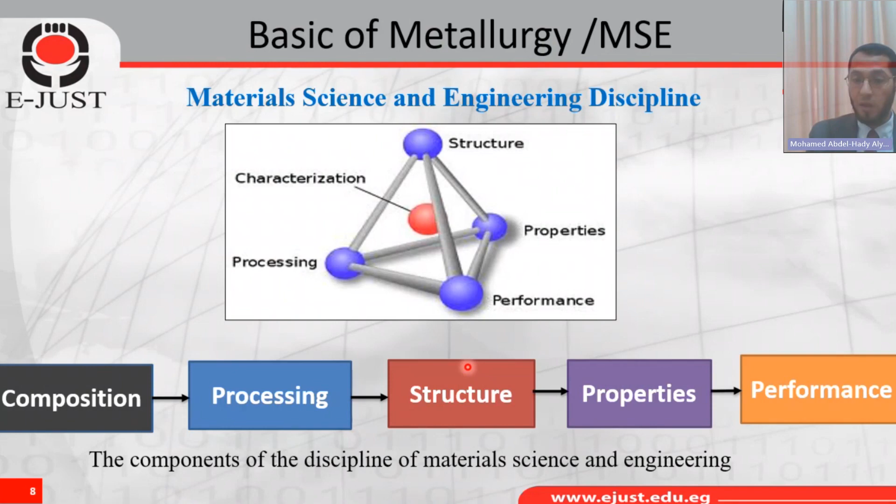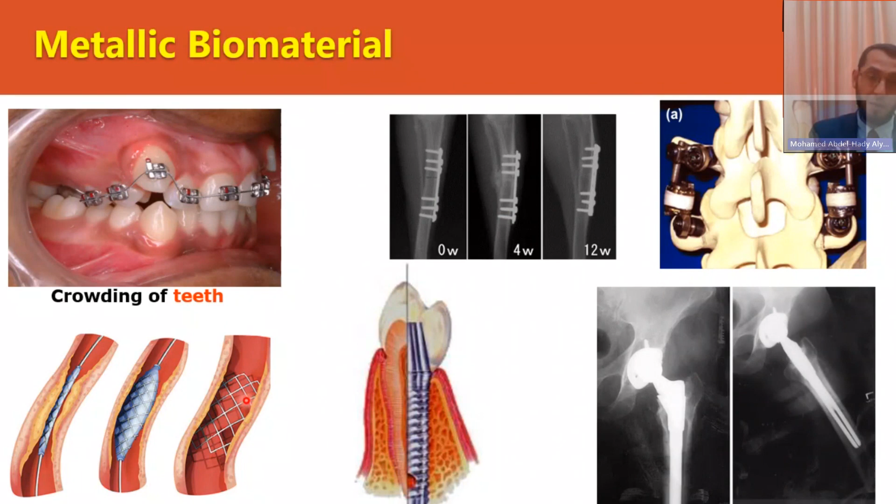Specifically, we'll talk today about biomaterials, not all biomaterials - we are talking about metallic biomaterials. It is very common in applications. You can see it in teeth crowding or tooth fixations - the guides, wires, or whatever, all these are metallic biomaterials. Bone plates to heal fractures, especially complicated fractures, spinal fixations, hip joints and knee joints, dental implants, and stents, even more. So these are examples. This field of biomaterials is actually a very wide and unique interdisciplinary field of work.

So if we're talking about the current biomaterials used, they have been developing for centuries, day by day, to meet requirements and have less harm on the body after implantation. There's always the theme of a new generation of metallic implants under progress, under improvement day by day. We have to start from material design, material processing, mechanical property, corrosion testing, in vivo testing, in vitro testing.

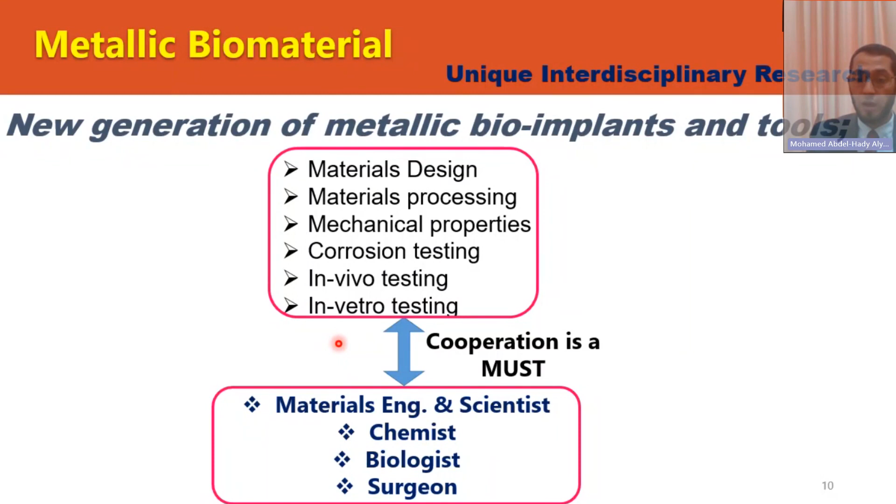In vitro is in the lab, in vivo is in animals or live organisms. In this sense, cooperation is a must. Many people should be involved to have the story reach a successful end—material engineers, metallurgists, scientists, chemists, biologists, surgeons—all should cooperate to have success at the end.

A general problem for biomaterials is they should fulfill basic requirements. Not any alloy can work in the biomedical field. First, it should have successful biological needs and requirements—the material should not contain toxic or allergic elements like nickel, vanadium, cobalt, and so on, as we will see. It should also pass in vitro and in vivo assessment.

This biological characteristic is special for biomaterials, other than other functionality like mechanical functionality or chemical inertness. Mechanical functionality includes high strength, long fatigue life, or low Young's modulus, which is sometimes essential. Sometimes a very high Young's modulus is also needed, depending on the application. Also, ultimate wear resistance is needed to do the function.

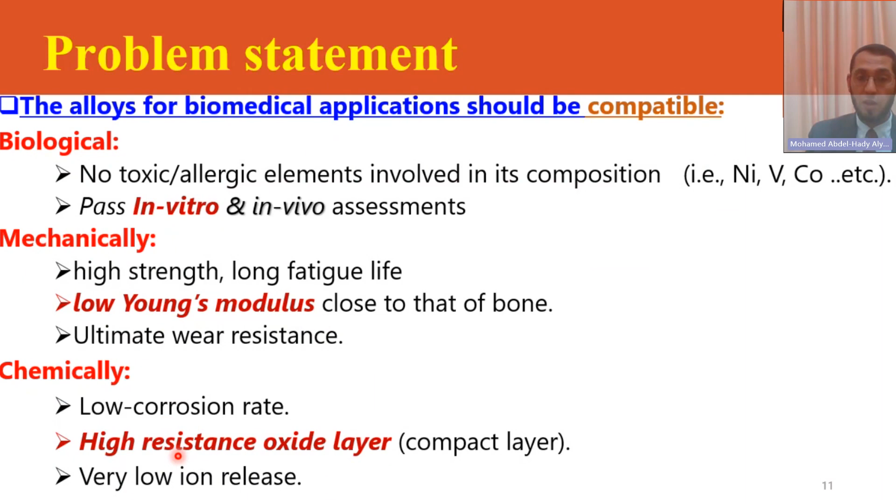Another requirement is chemical needs, like showing low corrosion rate, because of complications that may result if the material corrodes after implantation. There may also be modifications like making surface layers or surface modification to prevent ion release and so on.

Not any material can be used to be implanted in a body. We made a review to show the importance of classifying different elements by their probability, possibility, or compatibility to be used for manufacturing biomaterials or implants. Here's a table where we summarized different elements and how they interact with cells—biocompatibility, carcinogenic, genotoxic, mutagenic, cytotoxic, allergic, corrosivity, and so on.

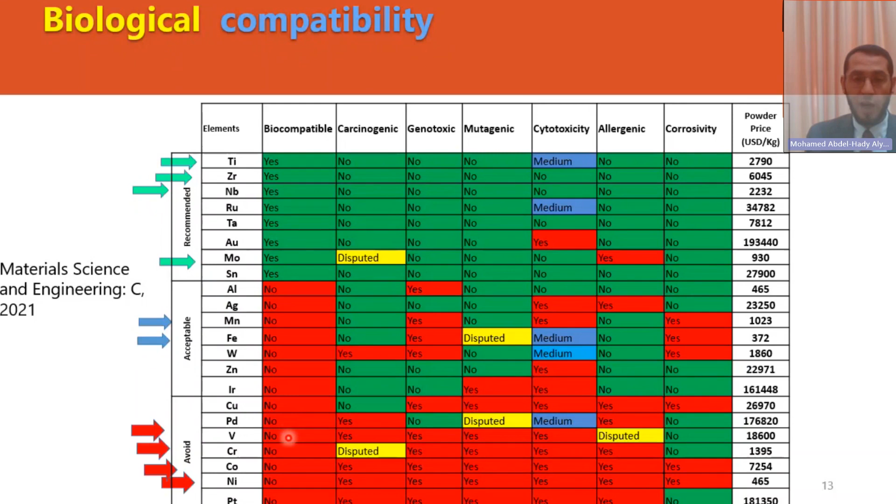But some other elements are very harmful in all cases, like vanadium, chromium, nickel, cobalt. As you can see, they're red—all carcinogenic, allergic, and so on.

If we go back to the most common biomedical alloys worldwide, you can see titanium-6-aluminum-4-vanadium alloy, which we call titanium 6-4. It's very common for manufacturing most implants. It contains aluminum and vanadium—and we said vanadium is prohibited. So it's a big problem that it contains vanadium, and we should have vanadium-free alternatives, although it is currently the most common alloy used worldwide for implant manufacturing.

Cobalt, chrome, molybdenum is also very common in some applications—cobalt and chrome are classified this way. Stainless steel, which is iron-based, contains nickel and chrome—nickel here again, and chrome here again.

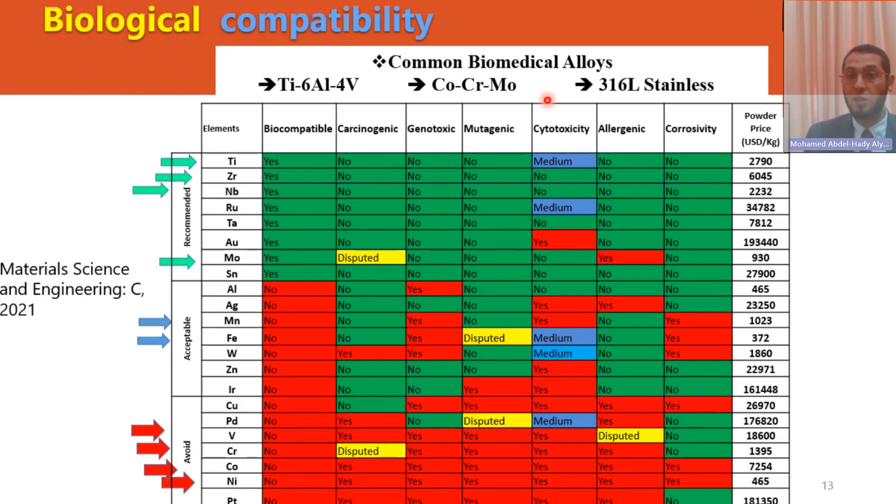Most common medical alloys have troubles for long-term implantation. They release some toxic, allergic, or carcinogenic elements, so they should be avoided in the future. Even in the short term, we can see how bone interacts differently with some alloys compared to others. Does the cell find the place nice to grow easily, or does it have a limitation with a bad impact on cell growth and the healing process?

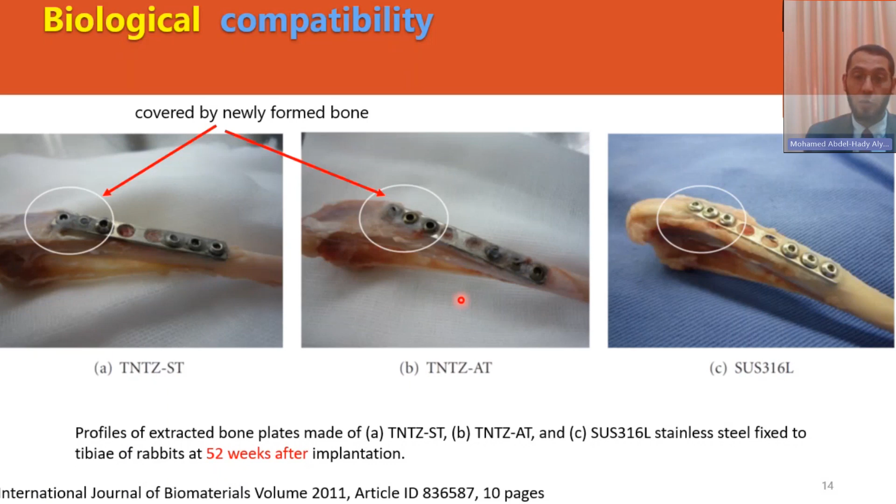Here is an example of a bone plate after implantation. One alloy called TNTZ, titanium-niobium-tantalum-zirconium, is good — all elements are very good — compared to stainless steel, which contains nickel and chrome. You can see new bone growing here with TNTZ, but compared to stainless steel, it's not growing. This means the environment around the TNTZ alloy is very healthy compared to the alloy containing nickel and chrome. So the growth of new bone is a function of the alloy and its composition.

Going back to other properties needed for biomedical alloys, some mechanical properties are needed to fulfill the application. Different applications have different requirements. Most need high strength, high fatigue resistance, and one of the important things we'll show you today is low elastic modulus.

The bone itself is naturally very elastic. So if the alloy that will replace bone doesn't have elasticity matching that of the bone, a phenomenon called stress shielding occurs — there's a mismatch in the elastic property, and a big problem happens after implantation.

Most surgeons know this problem: after implantation, the bone itself loses density and the implant becomes loose, requiring revision surgery with many complications. So superelasticity or elasticity is very important in many applications. However, for applications like stents, we need low elasticity or high stiffness. So we have to engineer the property depending on the application.

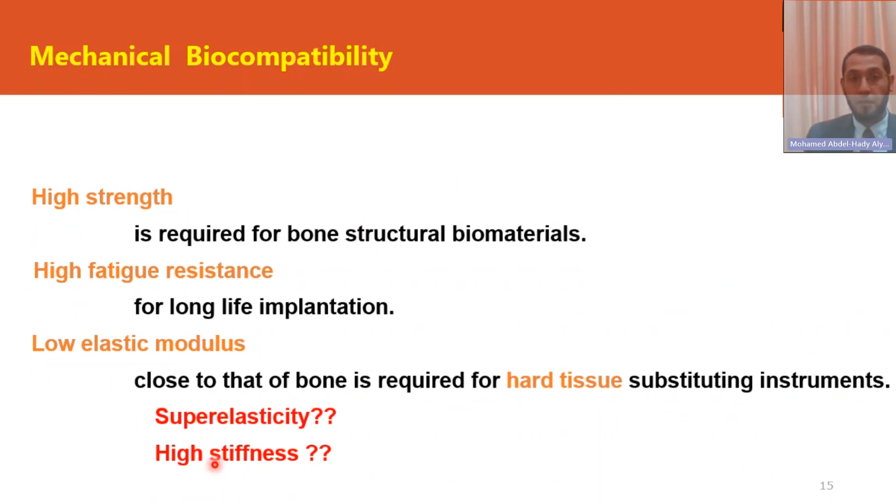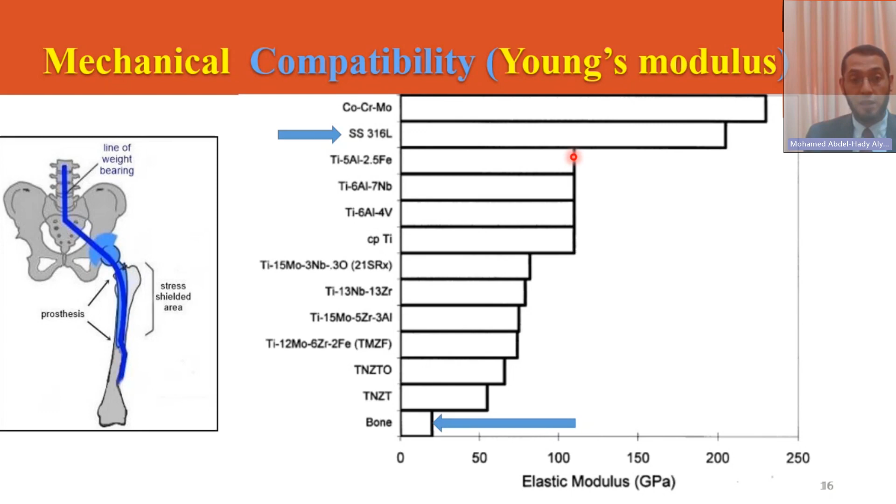Over the last 20 years or more, there's been a big push to introduce new alloys with low Young's modulus to avoid this stress shielding, which is a major reason for implant or biomaterial failure after implantation. Fortunately, there's one alloy, titanium-nickel alloy, that has very high or very good elastic properties.

Many people have started using titanium-nickel alloy because of this good elasticity compared to titanium-6-aluminum-4-vanadium. That alloy's elasticity is not good, and vanadium and aluminum are also toxic elements, so we should solve these problems.

Another trend came to replace this alloy with titanium-nickel alloys, but with high nickel content. Nickel itself also has a problem — it's cytotoxic and causes allergy for many people, both men and women. As I remember, around 20% of men have nickel allergy — I'm one of them — and 10% of ladies have nickel allergy. We have to avoid allergic reactions, because this means failure of the implant after implantation.

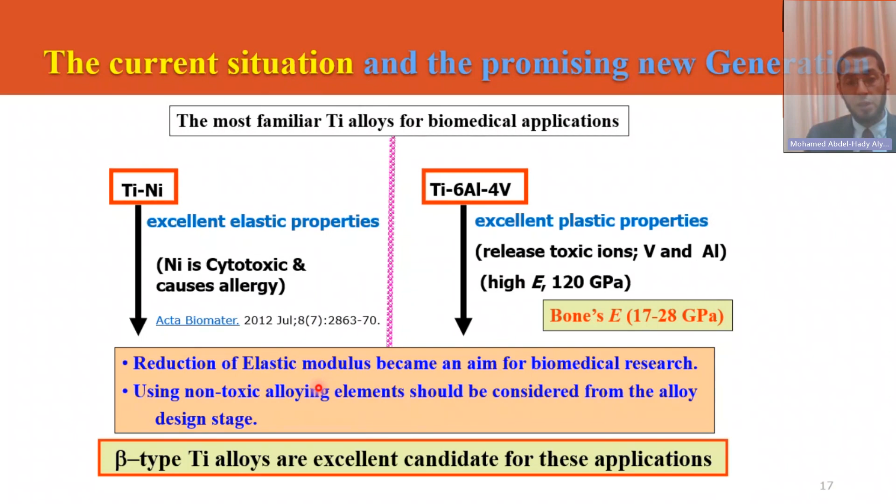So much research focuses on reducing the elastic modulus of alloys. We have to introduce new alloys with low elastic modulus, and from the beginning, avoid elements that cause trouble — cytotoxicity, carcinogenicity, allergy, and so on. I won't go deep into what other people did, but I'll show you roughly what we have done.

So titanium alloys, the beta type of titanium alloys, is one of the solutions. Titanium is an active element that has allotropic transformation. It has alpha phase at room temperature with HCP structure and beta phase with BCC structure at high temperature. There is a transition from beta to alpha that we call beta transus.

So alpha stabilizers are like aluminum, oxygen, nitrogen, carbon. Beta stabilizers that stabilize the beta phase down to room temperature, over a wider temperature range, are like vanadium, molybdenum, tantalum, and so on. Anyway, engineering the microstructure or phase stability of the alloys is very important because it's a function of the property itself.

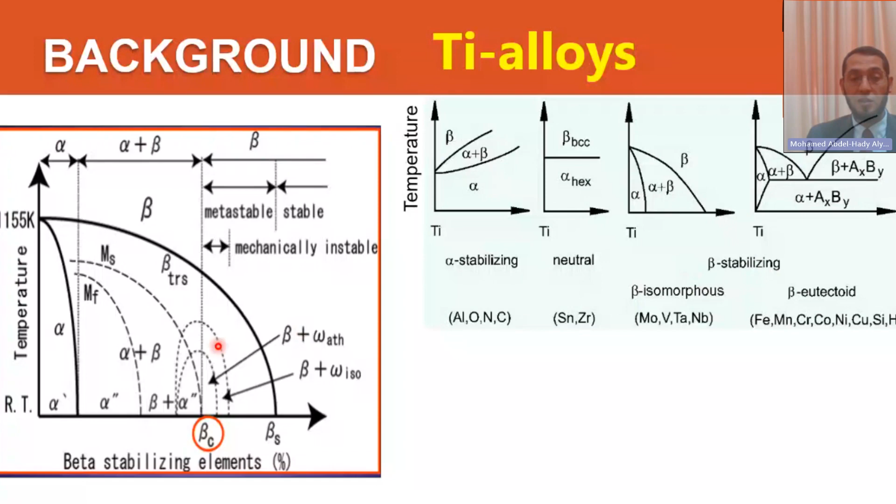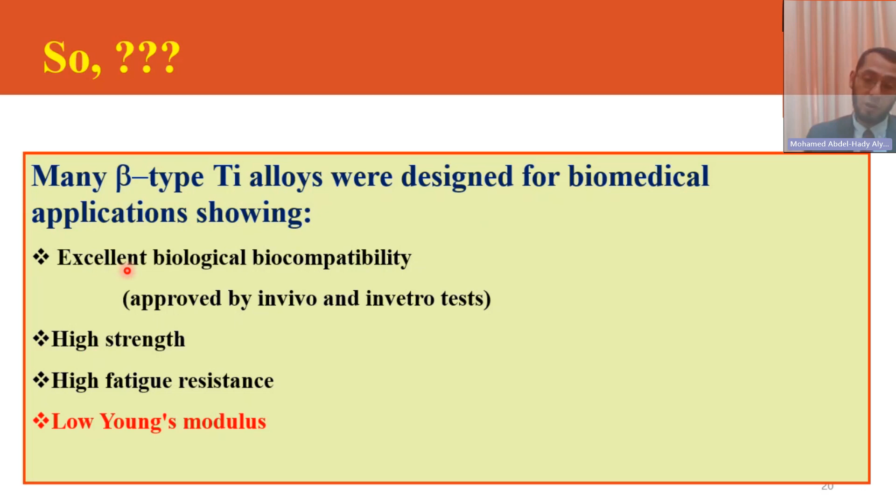We have to avoid toxic elements like vanadium and aluminum, and substitute them with niobium, zirconium, tantalum, and so on. And we get a lower Young's modulus. So now we've solved the problem.

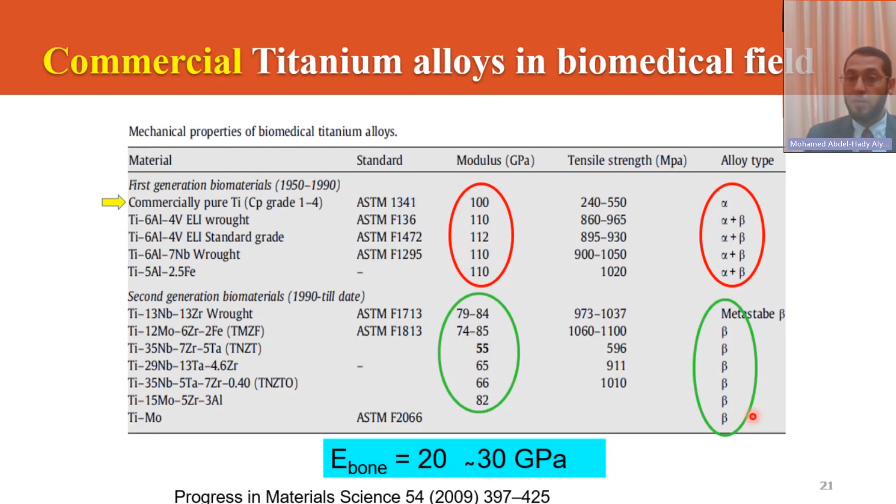They solved the problem partially. The elastic modulus is much better or lower than the first generation, and all are beta type, and they avoid the toxic elements and so on.

So we developed some techniques to further improve or manipulate the phase stability, with a diagram that we developed, called the phase diagram of bond order and metal d-orbital energy level. In this diagram, I won't go into details, but these are electronic parameters we use to design the alloy.

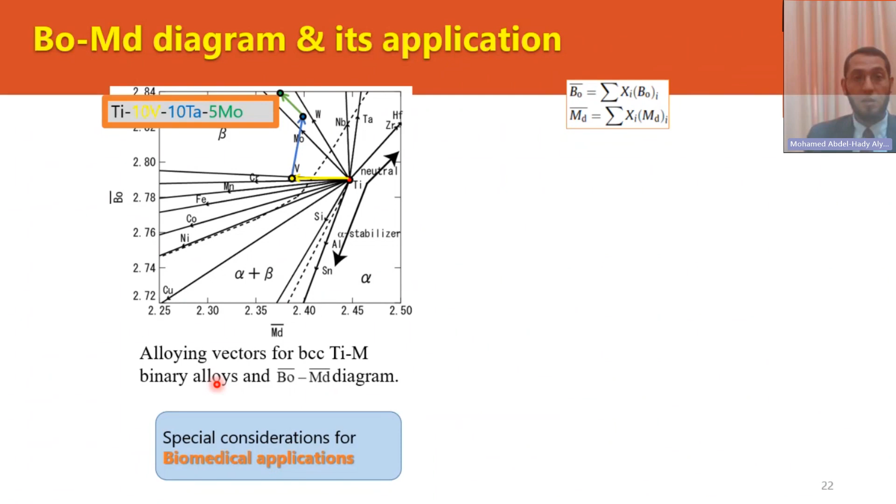In this diagram, we can easily predict the phases of the alloy as a function of composition. We do these calculations and can predict from the beginning how to design an alloy for biomedical use with specific phases, from the composition point of view, and also how to achieve low Young's modulus. Low Young's modulus can be achieved in this diagram around this region, these values being the Young's modulus.

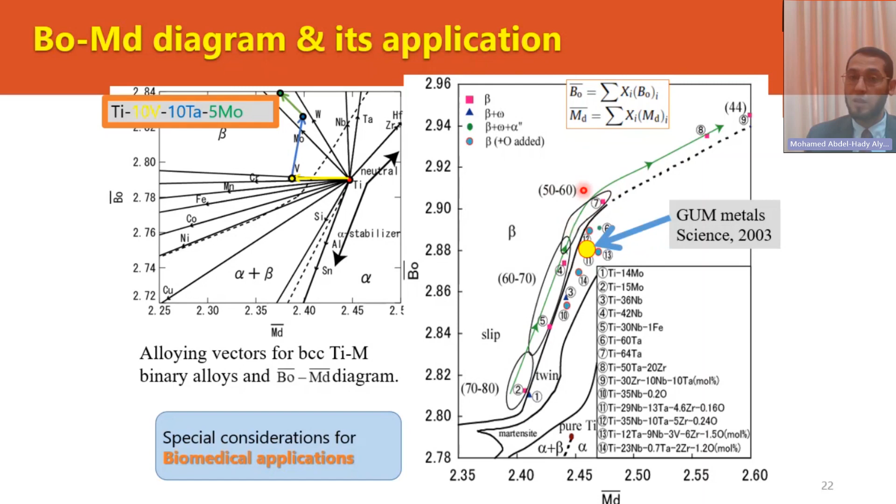So in some way, as a function of the phases, Young's modulus changes with the beta stabilizing element content. You can see here different phases show different Young's modulus. But most of the elements follow the same geometry in how the phases change and how it relates to the Young's modulus.

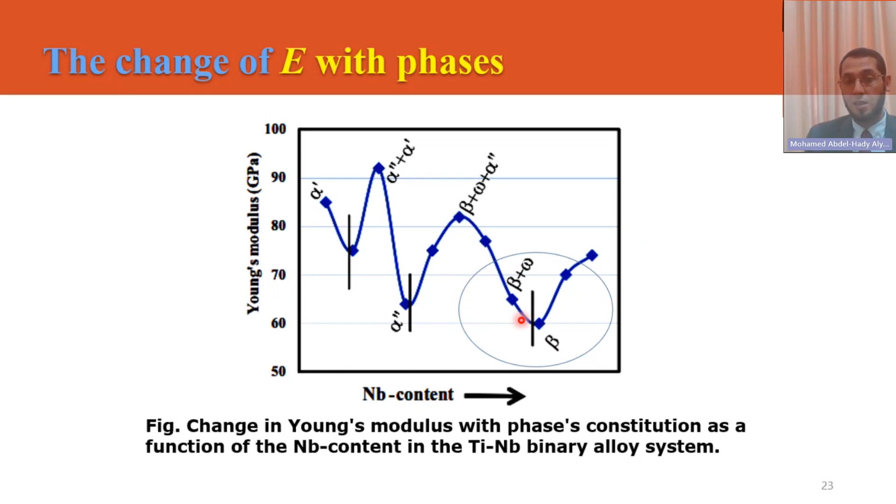Among all these, we can see that the lowest Young's modulus, which is one of the targets, is around the single beta phase zone, with beta plus omega and other phases around it. If we target this point from the composition point of view, we will achieve the lowest Young's modulus, so the highest elasticity, which means the lowest stress shielding probability.

Alhamdulillah, we did some work on this, and we can see some of the alloys we developed based on these theories: titanium, zirconium, niobium, tantalum, with some minor modification with iron and oxygen. So we can achieve a Young's modulus very, very small - very close to that of bone.

The bone is in this range, and we can achieve this value. So how can we do it? By composition, as said, and processing - cold rolling followed by solution treatment. So these conditions, material processing combined with composition, allow us to achieve the required properties.

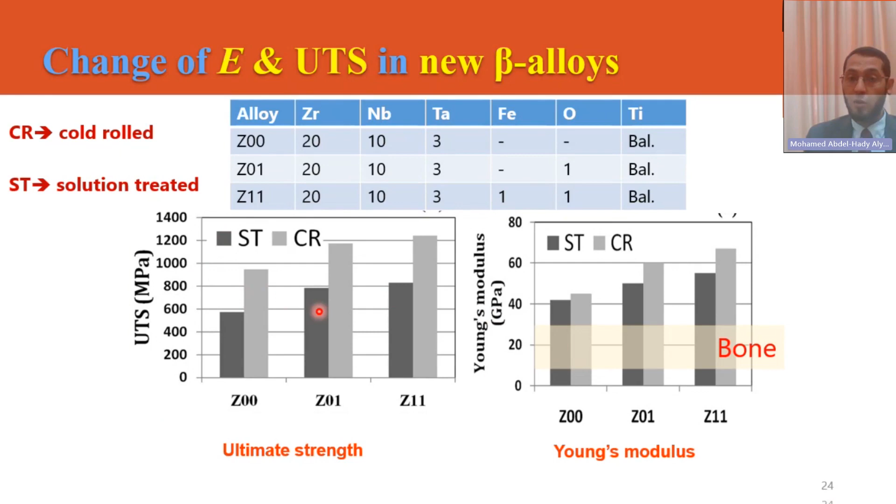And this is the strength of these alloys, which is acceptable compared to the commercial alloys and so on.

Not only mechanical property, we should measure how these alloys will behave in simulated body fluid. We should measure the corrosion resistance, also the cell viability, how the cells, especially the bone cells or live cells, different live cells, depending on the application, will react with these alloys. So all are successful, the cells are very live, active, healthy.

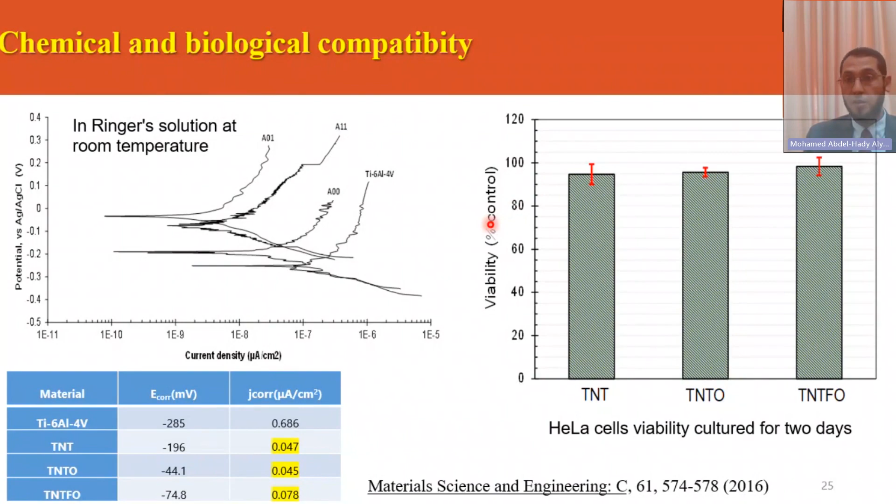This one has been published. It's a very good thing, out of the collaboration with many people. We developed one alloy that's very good and proper for stent application. A stent is used to widen the vein or artery when narrowing happens, so the blood can flow freely. We have developed an alloy that can be used to design a new type of stent, what we call a self-expandable stent. It's located at the vein or artery with the problem, and then it expands by itself.

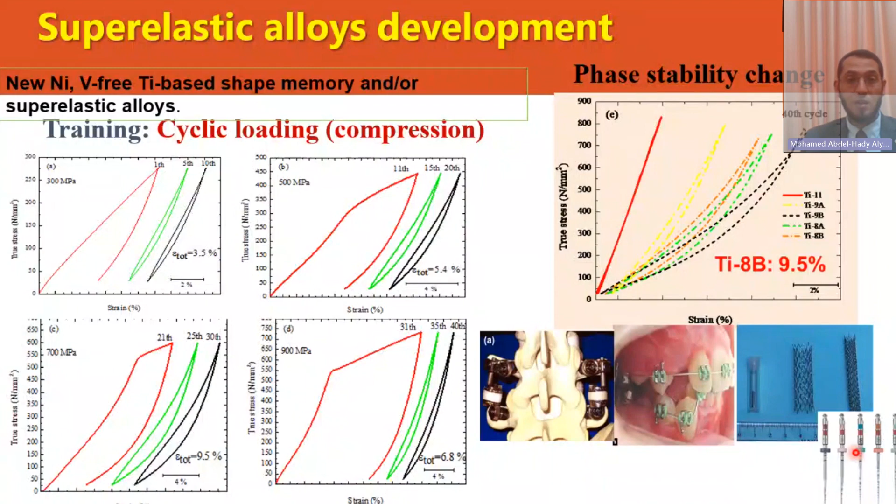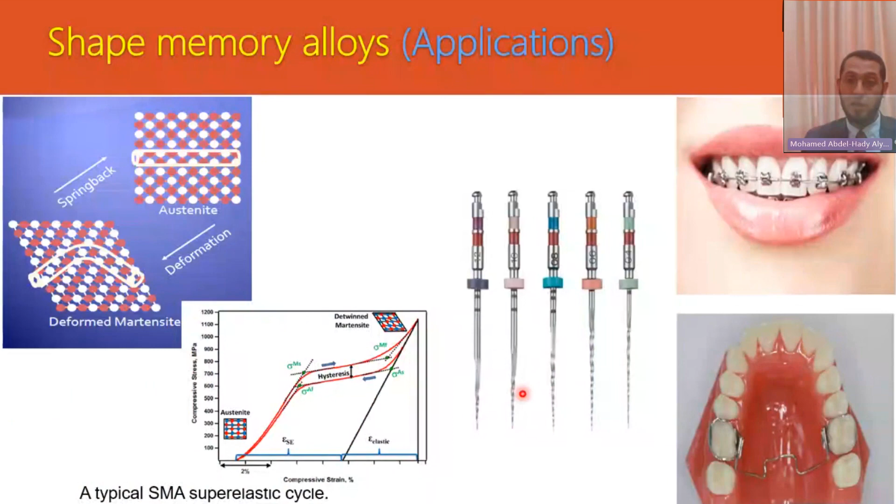This is very important to design an alloy for spinal fixation. The spine needs a very elastic material. For teeth crowding wires, self-expandable stents, dental tools, and endoscopes, all of these need very high elastic material with good strength. This is achievable with this alloy design technique. All these applications require very elastic materials that can flex and do their function properly, and we have to develop different alloys for each.

Another property is needed for a different type of stent called balloon expandable stent. This is a different type of stent that also needs different properties. I will not go into this one.

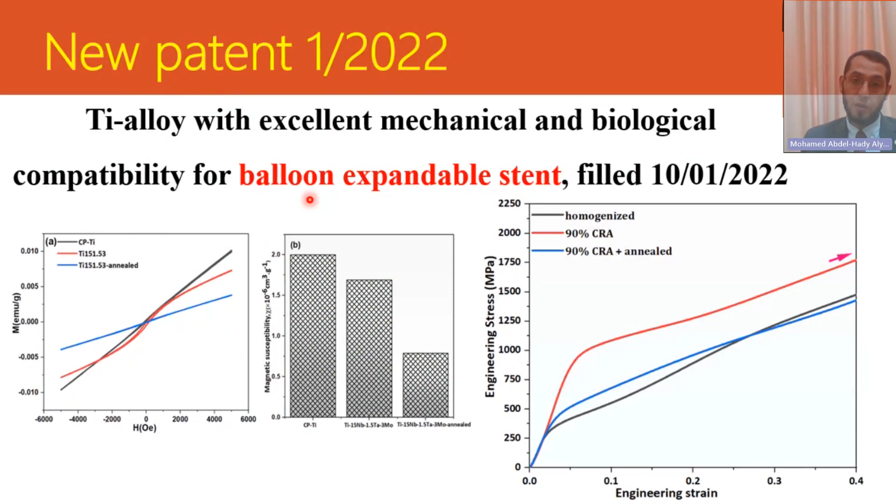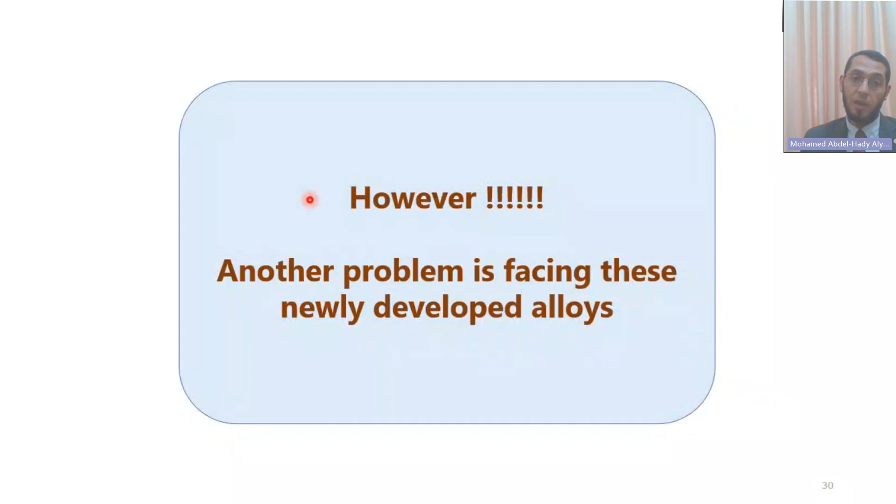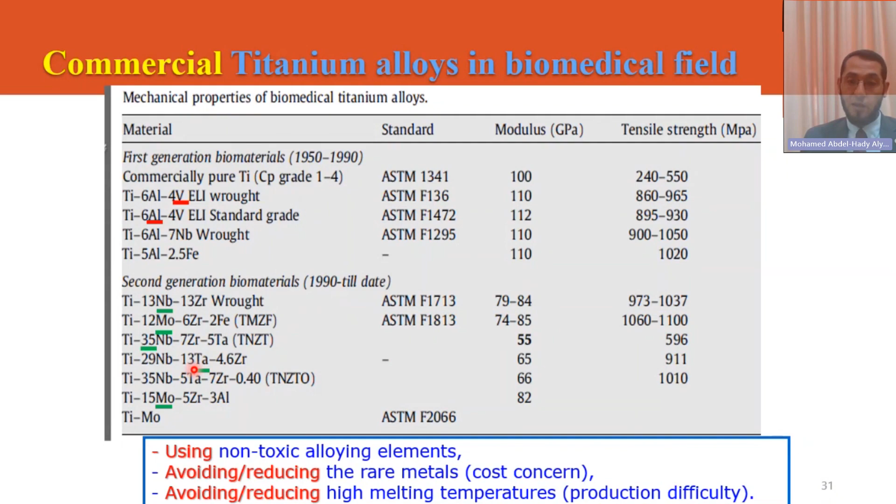So we did another work—if we know the story, the way, the mechanism, the technique—that if we control the stability of the phases and the microstructure, we can achieve the required properties. So we did it using the low cost...

Sorry, Dr. Gepreel, we have some sound issues. Can you hear us?

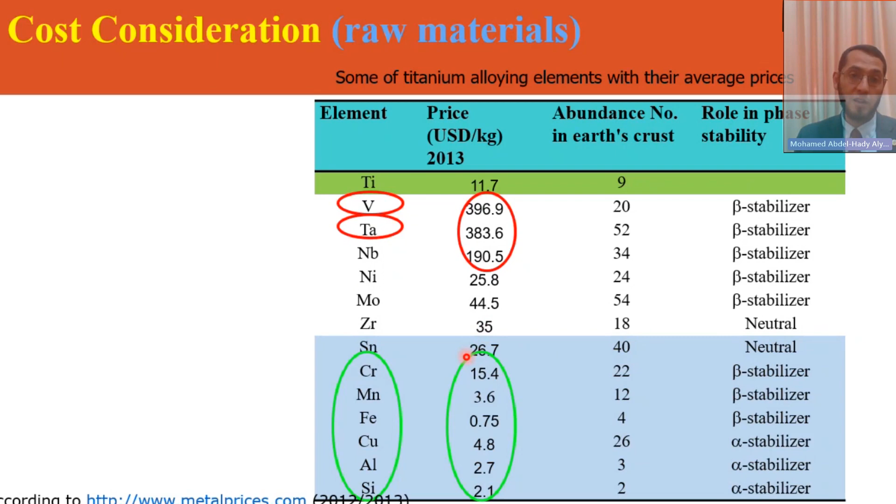This is research we have been working on for maybe 15 years in this field. If we use the same techniques and mechanism, using the phase diagram, we can predict the phases from the composition. This alloy is a function of iron, a cheap element, with small amounts of the expensive elements. So we can control the phases and microstructure using the cheap elements, while keeping the high cost elements at a minimum to do the needed function.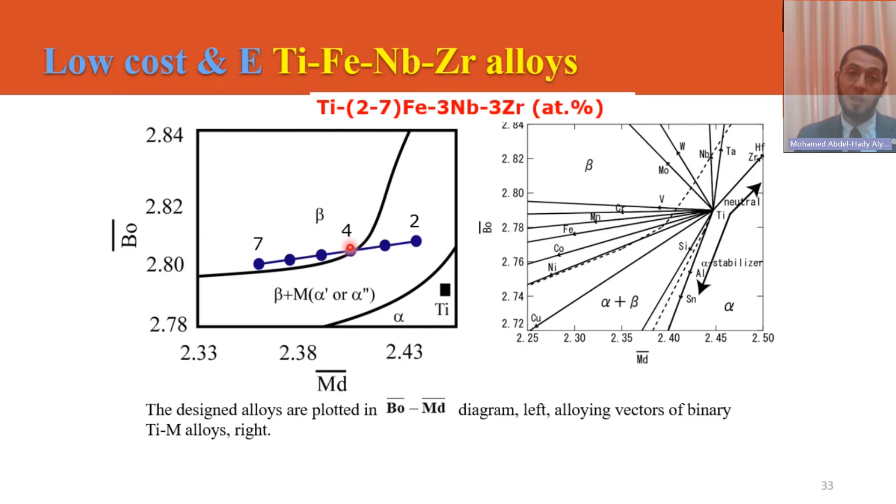As expected and as planned from the composition, this is experimental. As a function of iron content in this alloy system, this composition shows a phase stability transition from beta phase to beta plus martensite, and the lowest elastic modulus is achievable at this composition, at 5% iron.

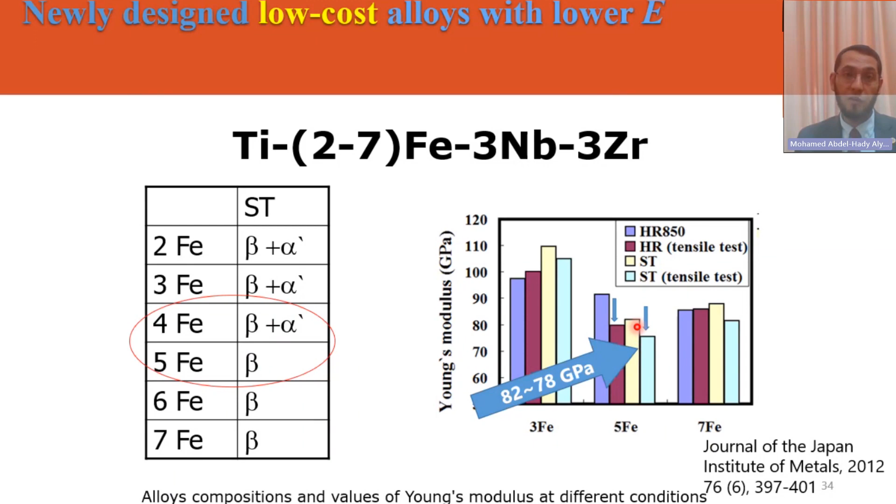So now the tool is working very efficiently from the composition. We can manipulate the microstructure and control the properties that we need, and low Young's modulus is achievable. The strength is still very high for these developed alloys. This is very good work that has actually been done.

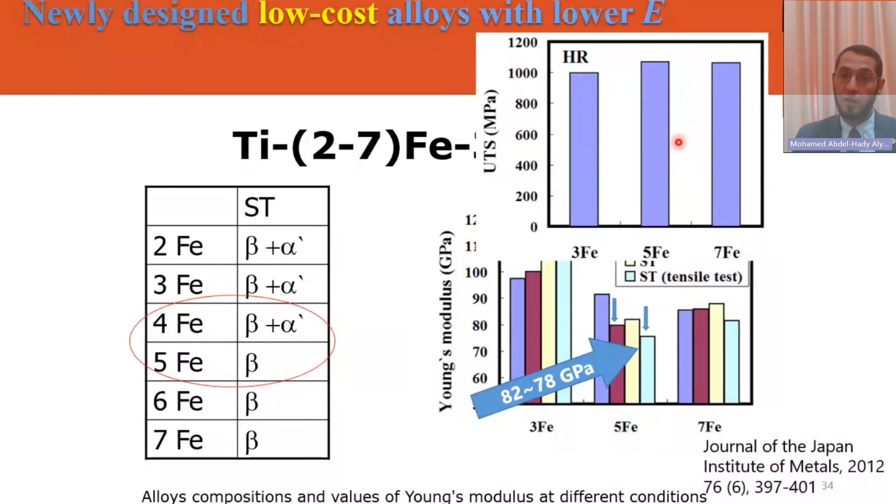This was a very promising alloy we developed, which is cheap and successful in all the biological and mechanical tests needed. So we moved to animal tests for this alloy because it was successful in the lab.

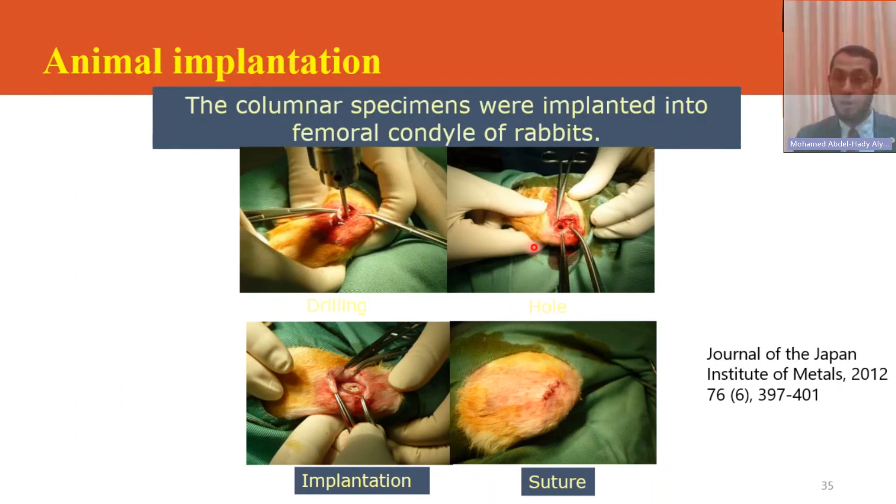If we compare our alloy, this one which was successful, a 533 alloy, to the commercial titanium-6-aluminum-4-vanadium and stainless steel, which are commercial ones, we can see here our bone. This is the implant, and this is the new bone generated around the implant.

We can see here it's very nice. The bone grows around the implant very nicely, with very good adhesion between the bone and the implant, much better than titanium-6-4. You can see the bone doesn't grow well around the stainless steel implant by comparison. This means this alloy is very successful from the composition, cost, biological property, mechanical property, in vivo and in vitro test points of view.

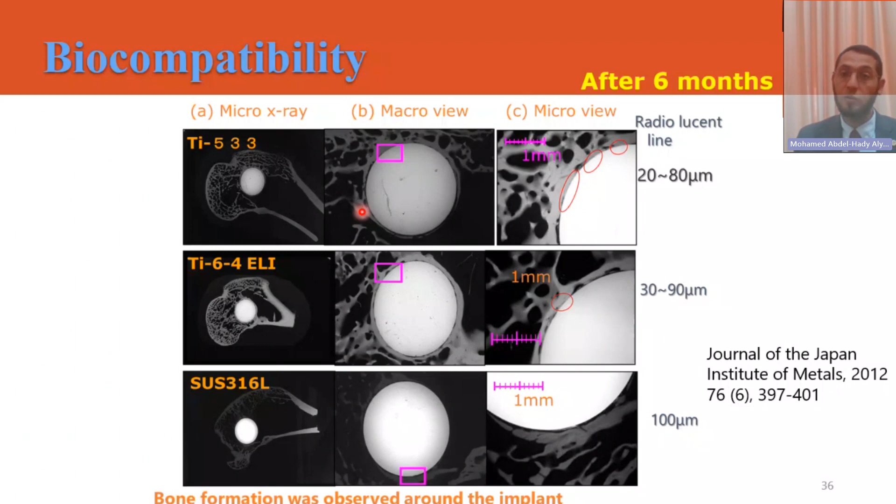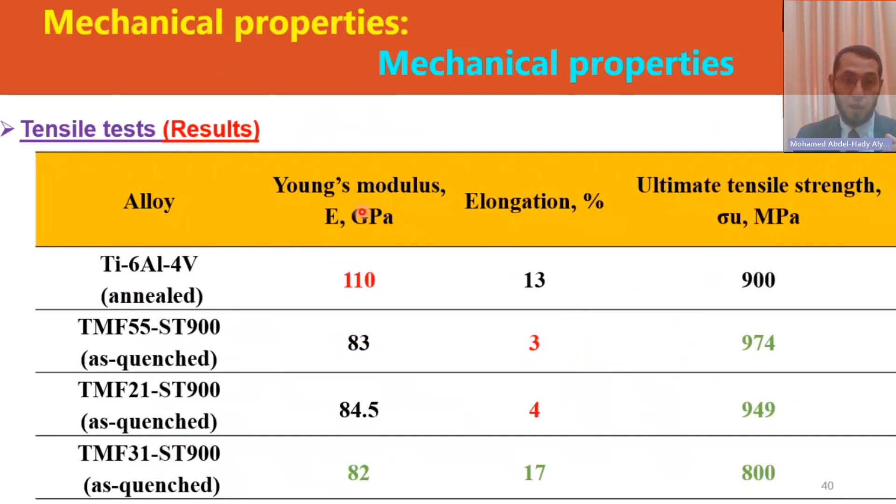It's very successful. We can also do further work reducing the cost using many techniques. I will not go into that, but anyway, we can calculate the density and everything.

Not only this, but we also looked at other mechanical properties like tensile strength and specific strength and so on.

We could achieve this from the titanium-14 manganese alloy system. It was very successful in mechanical property, biological property, and strength through thermomechanical processing, with very high strength. With its low density compared to stainless steel, the specific strength of the alloy is very high, and the cost is very low. So this is a summary.

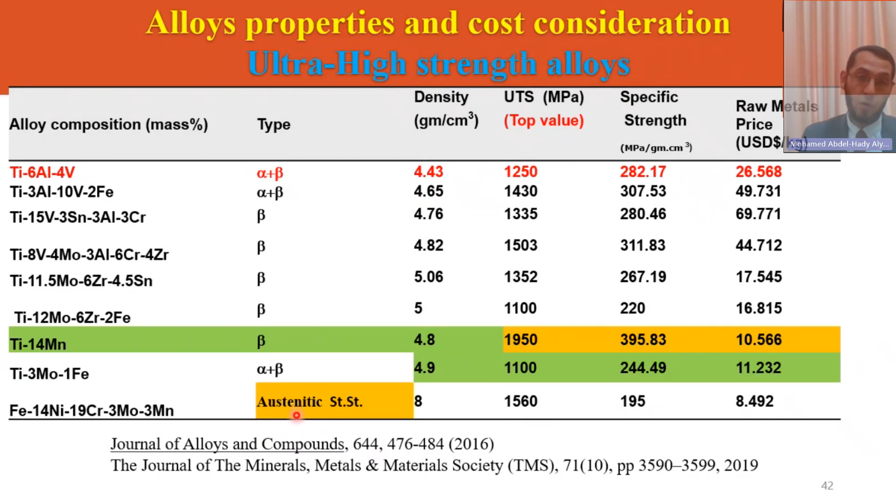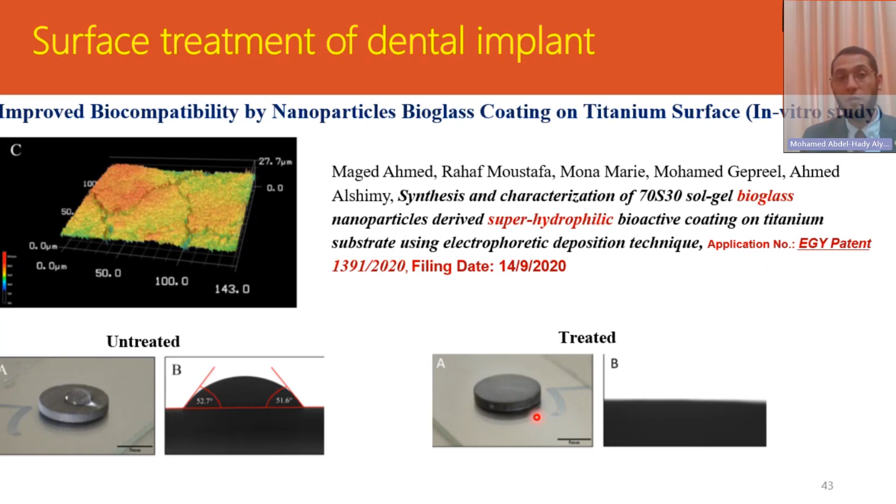Not only this, but we can also do surface functionalization for dental implants, for the tooth root, to have very good surface suitability needed for dental applications. This is in cooperation with dentists, Maged and Rahaf, and Professor Mona. We make surface functionalization of the implant itself with bioglass, achieving a super hydrophilic surface. This has been filed as a patent.

Recently we also use artificial intelligence to speed up the alloy design. Now we have a good understanding of the relationship between composition, processing, and properties, so we can speed up discovery of new alloys for the biomedical field. We use neural networks to design new titanium-based alloys for implants with low Young's modulus and high biocompatibility, and we've been very successful in this.

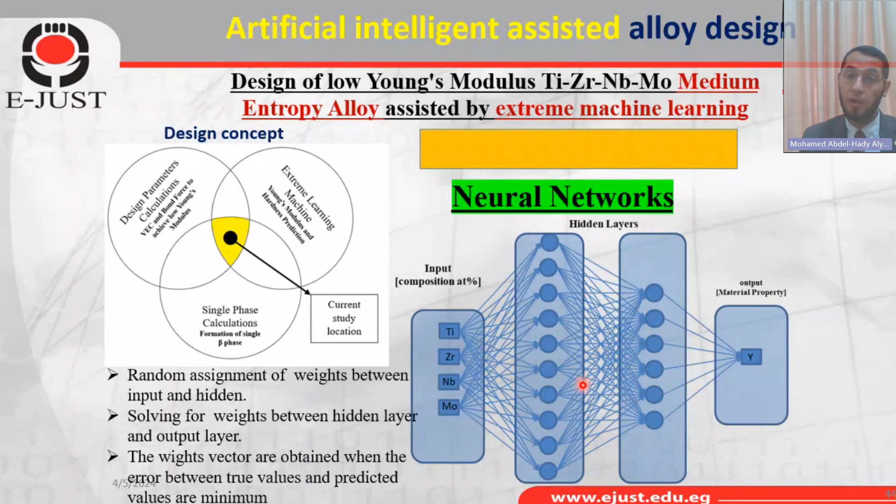To conclude, many excellent titanium alloys have recently been developed showing competing compatibility compared to commercial ones for different biomedical applications. They show high strength, low Young's modulus, high corrosion resistance, easy processing, low cost, and good biocompatibility. However, we need further in vivo and in vitro tests for the implants or biomaterials to be developed. It takes a minimum of 15 years of work.

It is successful now in the lab, and we should go further for in vivo and in vitro tests so we can reach clinical trials for official approval. Official approval is a very complicated issue, so we can compete with commercial materials. In this sense, cooperation is a must - we need to cooperate with all concerned specialties, so our new alloy can reach the target patient healthily and for long-term implantation. Thank you so much for giving me this opportunity.

I think now I am ready for receiving any comments or questions. Dr. Mohamed, I have a question about the future of biomaterials.